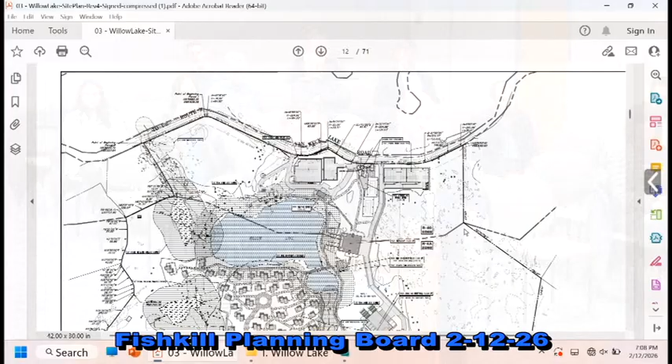Any further details you might want to give at this point? I know we'll have more discussions, but for the benefit of those at home who might not be familiar with it. Sure, I think from a high level, what we are proposing is a commercial recreation use, and what we hope to be a retreat.

Our use is very particular to enjoying the environment that Willow Lake is. There's going to be, I'm sure, a lot of discussion around what this site may produce. I just want to make one overarching comment, which is that the primary purpose of this retreat is to enjoy the nature and the beauty that it is set within.

We've taken special care and consideration to make sure noise levels and things like that are significantly considered for our own guests, which is obviously a major consideration for us, as they're only a couple hundred feet away, if not 50 feet away, from some of our main uses. We really put a lot of thought and care into how this is proposed and laid out, and we hope the public will see that we've considered all of the surrounding environment, and that it is our interest to make sure that is the case for them as well.

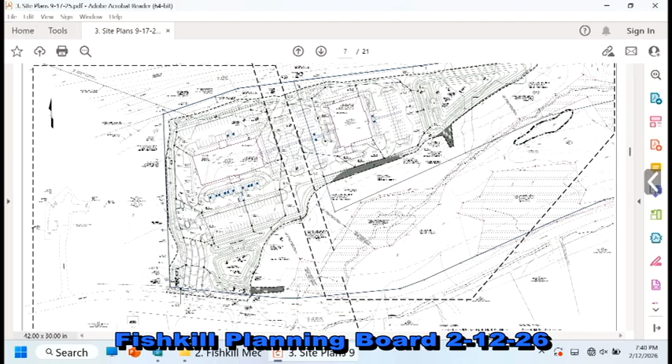To prevent further impact to the wetland areas, we have measures that will be implemented on site: control of dust during construction specifically, with dust control notes added to the erosion and sediment control plans approved by this board; implementation of erosion control measures during and post-construction, consistent with the SWPPP and erosion sediment control plan, monitored by our staff and the town engineer; and particular attention to avoiding any non-native or invasive species in the landscape plan, so we don't impact any wetland species.

The implementation of these design measures has been determined by the biologist to mitigate any potential for significant impacts on the nearby water resources. So, thank you.

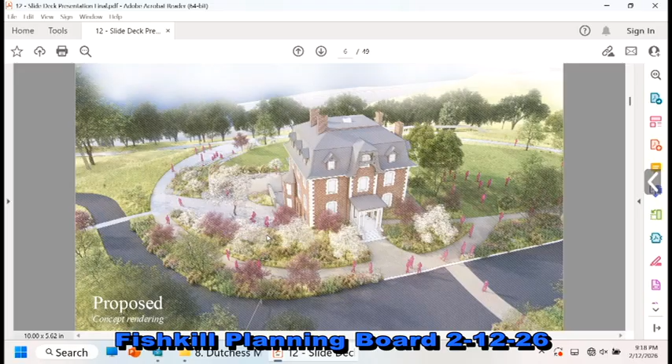Okay, so as we said, I'll go really quick. The proposal is to restore Dutchess Manor with historic restoration, removing the additions back to the original building, and then adding landscaping around the facility that would have public park space function, some classroom space, and public restrooms. We'll reconfigure the lot in the front.

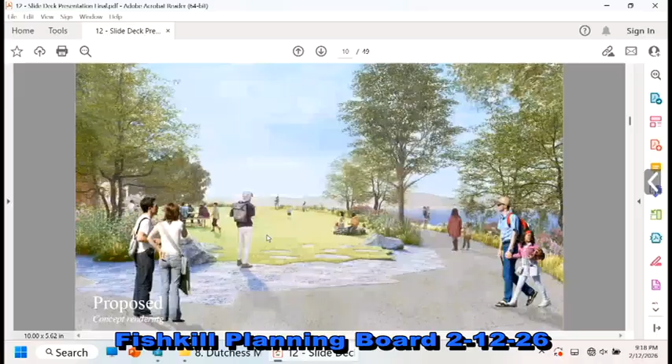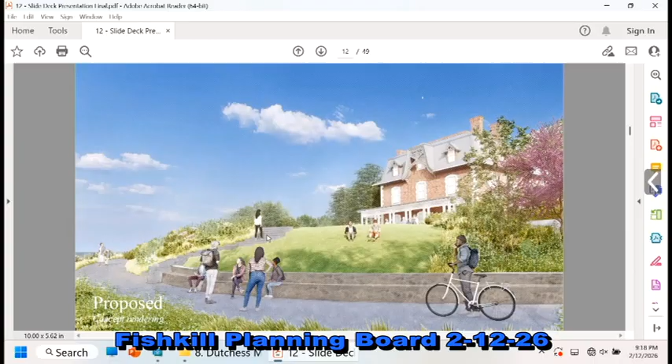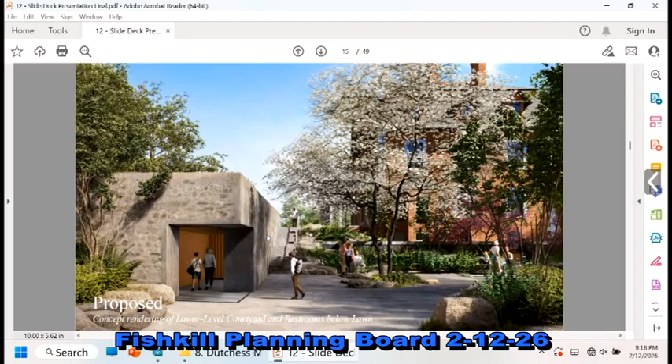This is the restored space behind once the building footprints are reduced. And this is behind the building, again, more space for just recreation. So before, after. This is on the side where the restrooms are, and a little garden space that could be used for a classroom or just a little gathering. So that's the development proposal.

This would be used as our staff office spaces. The first floor would be used as a visitor center, and then the parking and shuttle to bring people down to the trails at Breakneck.

The key themes we saw in the public hearing comments, by theme rather than comment by comment, are these five: parking and traffic, buffers and screening, trees, environmental performance characteristics, and some operational details. I'll quickly walk through those five topics. There's a combination here of information answering those comments, and also some changes and modifications we've made in response, and I'll try to call out which is which as we go.

So for parking and traffic, the key thought is that we're making the existing traffic and parking patterns safer and more organized than the existing condition overall through the corridor, because this is serving an overflow function with 9D, and managing the parking for regular use versus occasional overflow.

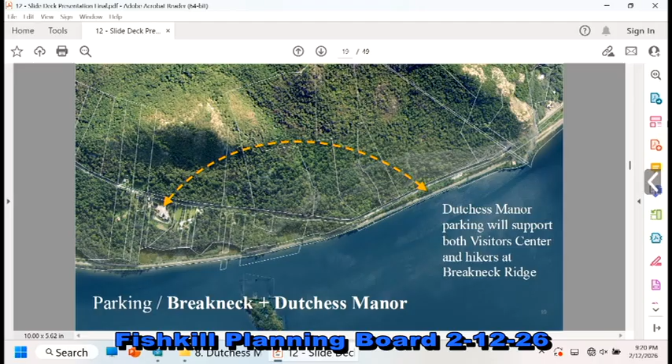This is the condition we've been working to solve down at Breakneck. We're cleaning that space up right now with the Breakneck connector, knowing there will be additional parking demand, looking to accommodate that up here, and then shuttling people down so they're safely off the road, not walking or parking in dangerous ways along the roadway as they have historically.

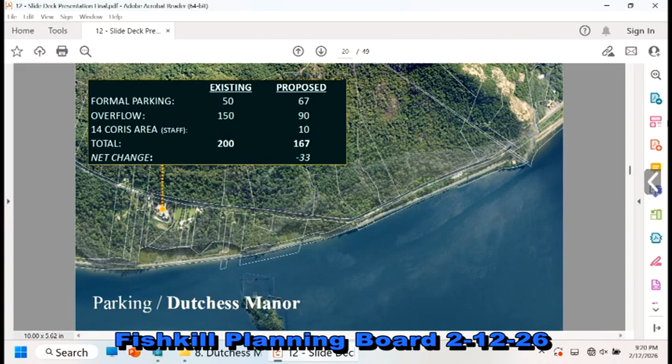The total parking relative to how it had been previously used is actually lower. We've gone down a little bit. The original proposal was for 181 spaces. We're now at 167. In the modifications, I'll show you where they came out of, but we've taken the total count of parking spaces down a little in this current submission.

The traffic study, there were a number of comments on it, but the study itself found no significant adverse impacts, and the review by Fishkill's consultants concurred with that conclusion.

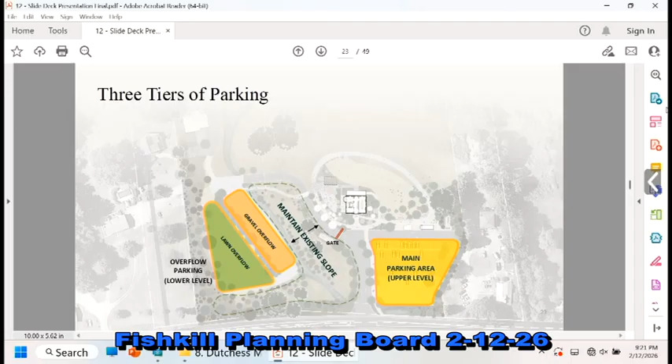This shows the planned parking locations in the site plan, both right in front of the building as it currently exists and off to the side. In the yellow area is the main parking supply, which is what's going to have daily use from staff and visitors. Because this is an outdoor recreation space, there's seasonality to the use, more peak weekend days. So year-round weekends and weekdays you'll see parking in the yellow. In the orange, it would really just be peak weekends. And in the green, the grass overflow lot, that's the last one we'd open up for use, so it would be the least frequently parked.

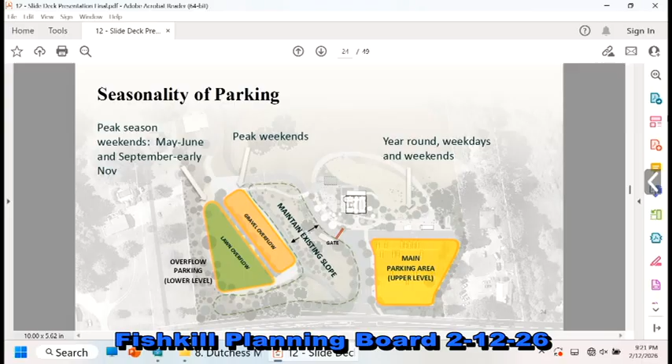The second theme was about buffers and screening, so there were calls to further expand the buffer to the south and retain more existing trees. We've done both of those things, and I'll show how that happens.

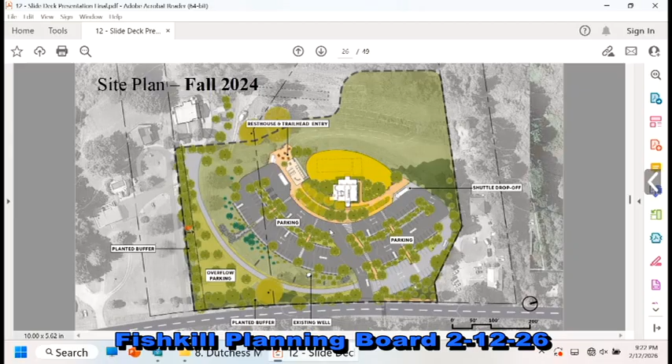We've done this over the course of the total development, but also in this last iteration. The original site plan had this configuration for the parking, shown in dark gray, all paved parking. Closer in this area, all of this would have been a regraded hillside with parking there. We've pulled that up and away from neighbors to the south and put it in the existing lot location for the regular everyday parking.

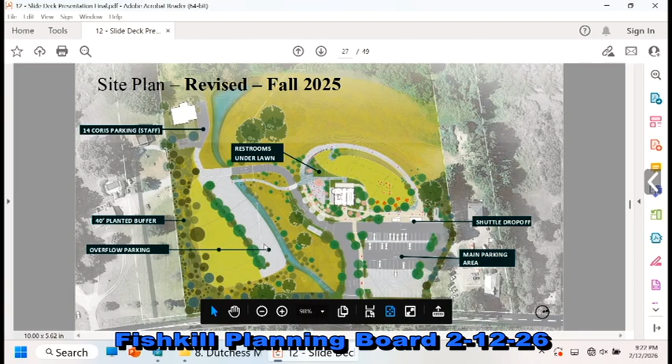This is seasonal parking, really used in peak seasons of May, June, and then the fall foliage peak. These are some of the explorations as we tucked that space in.

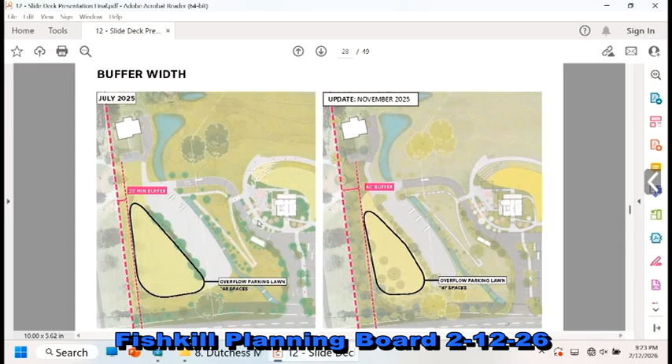After that move, we've continued to condense that footprint. You see in July the footprint, followed by the November footprint, which was much thinner and added more buffer space—we went from a 20-foot buffer to a 40-foot buffer. Now we've further expanded that buffer on the western side towards the river, closer to the homes there—it's a 45-foot buffer, widening as it approaches 9D, which is more of the view shed for adjacent neighbors, to an 82-foot buffer. To do that we had to reduce parking, so about 17 spots came out of that location, and we took one more spot out of the gravel area in order to save a tree.

On trees: in the revised plan we were asked to keep more of the existing trees so there's more day-one presence in the plantings instead of newly planted trees. We are planting between 300 and 350 new trees, which will support biodiversity. We've selected a plant palette that matches the oak-tulip forest of the park preserve across the street, trying to pull that down off the mountain.

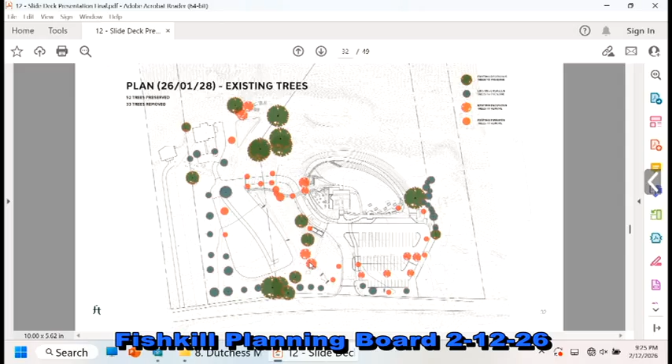Because we're planting lots of trees, these are new trees coming in that are over 4 inches of caliper or higher, so we aren't putting in all just little tree sticklets. There are going to be some substantial trees placed into this planting strategy, and at the end of the day, this will be the tree plan, looking at about 400 trees on site.

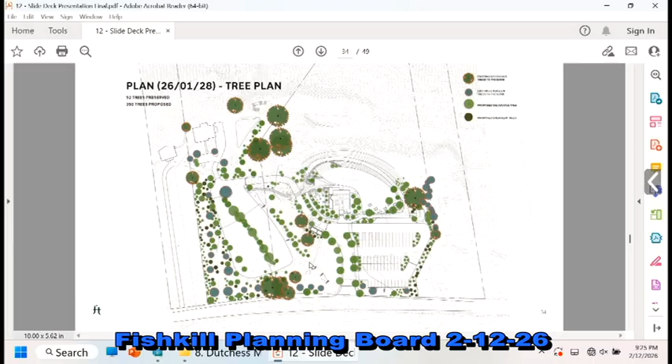Closer to the house, it's using this forest edge, so you have some flowering trees like red buds and dogwoods, and in the more expanded area of the site, we're pulling in that oak tulip forest, which is what's at the park preserve. So all native plants, and those will have different functions—some have berries and are good for pollinators or birds, and that's the mix we're pulling in.

Third theme is environmental performance. We'll note that we are reducing the impervious surface from the existing condition with the proposed development and making a number of moves to improve the habitat and ecosystem health.

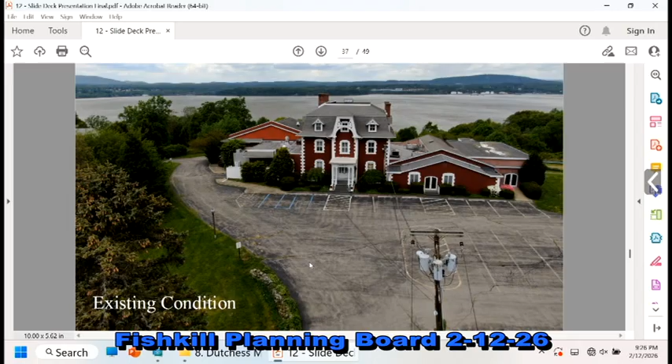This is the existing condition, and obviously the building components that we are taking down are all impervious surface, so when you remove those, you gain a lot of space to work with. This shows the statistics: in the total new site plan, it's 0.14 acres less impervious surface than the existing condition.

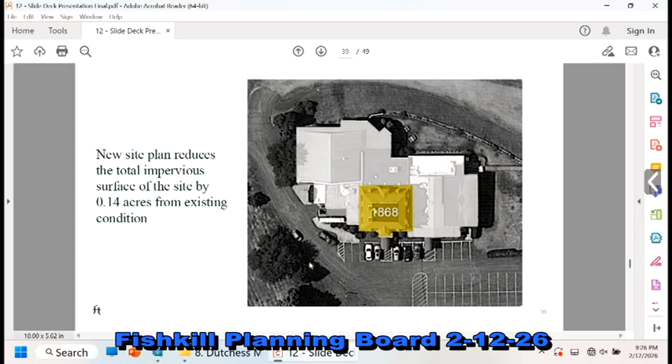And then what are we putting in? Right now it's just a standard lawn, grass lawn with some ornamental species. We'll be planting in the bioswale, which is the drainage area that goes along the side and down to the back of the property, with plants that can get wet and dry and handle that condition well, like Joe Pye weed. And behind the building, the restoration meadow that we've talked a lot about has a mix of native meadow.

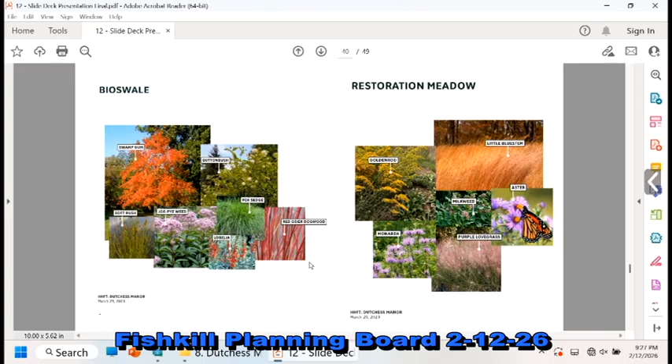This is a rendering that shows how that might be in the future. And a note—this is the space, there was a memo in your packet speaking to the ways we're using targeted herbicide treatments of invasive species as we prep this space, which is currently overrun with invasives, for a restoration planting of a wildflower meadow.

So you have hopefully enough detail about what's being used, and I'll just augment that we are also using other means—it's not to say that's the only thing we're doing to combat invasives. There's been targeted mowing, we use mechanical means wherever we can, or in the future, once the Japanese knotweed is brought under control enough, you could place black plastic on that, and that can get it the rest of the way.

This is based on best practices and the species that are present, and there are different levels of what you need to do in order to combat them. Once they're under control, which takes maybe 2 years, then you have the planting—those native plants should be able to win that battle, and you can cease treatment. It's really about getting them under control enough that a restoration planting can be successful.

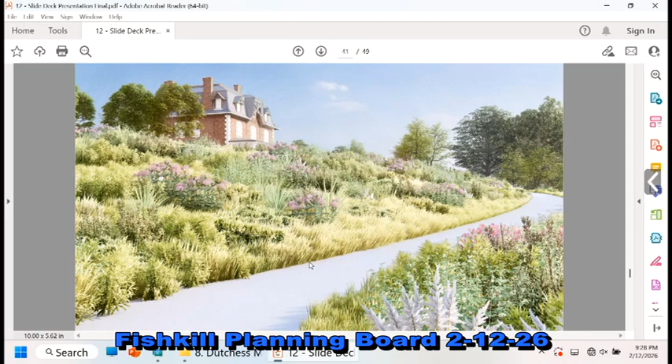Theme 5 is the operational details. So hours of operation was raised, lighting and security, shuttle frequency. Hours of operation are dawn to dusk.

We have a lighting plan that's in the submission. That's been through the analysis of foot-candles, and it meets all of the regs of the town—so this is complying, the lighting plan complies with your rules.

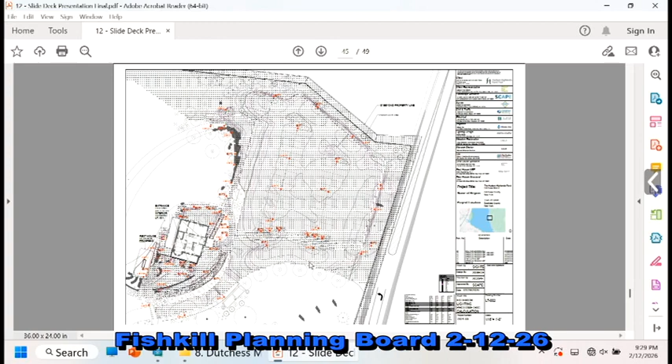And then we have some signage. There's some curiosity about what signs we're using—this is part of the palette that we have. This is the gateway sign on the roadway. There'll be smaller directional signs as you drive into the driveway that tell you, like, the shuttle goes this way, and where you can park. There would be a gate here to stop people from driving down unless we opened it on a peak day, and directional signage that'll take you to the bathroom. So there's a whole suite, and hopefully that's enough detail, though we're happy to provide more in the site plan process.

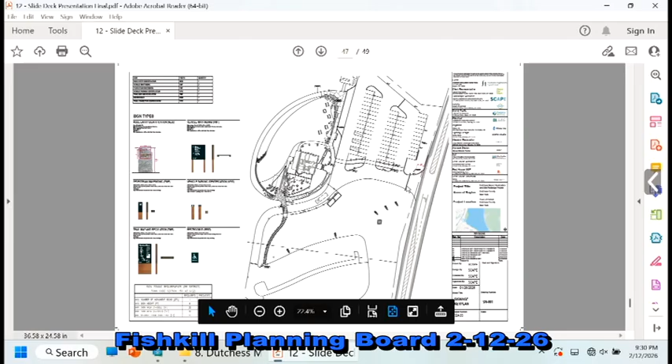And then about the parking and shuttle system, it's drive-in. There's these little pay kiosks, so you can do that with your license plate, and somebody can come around and scan and see if you paid.

This also has a mobile app feature, so if you're at Breakneck and you can't find parking, you can look at the app and it'll say spaces available still at Dutchess Manor, and you can come up and know predictably that you can park there. And as you're driving, you predictably know there's no spaces at Breakneck, so you don't have to go sharking around in there.

So again, we're trying to clean up that driving behavior. And then the shuttle vehicles, this smaller Sprinter van style shuttle, would just zip between, in the near term, right as we're opening, serving between Dutchess Manor and Breakneck. So if the lot's full, you go park at Dutchess and you can hop on the shuttle and go down.

Round trip is about 5 to 7 minutes, so it's really a quick lead time, so no one should worry about waiting. What are you going to do during peak times? That is peak times. I think we have plans for 2 shuttles, so one could be going, and they can be going back and forth.

And that was that. Those were the 5 themes.

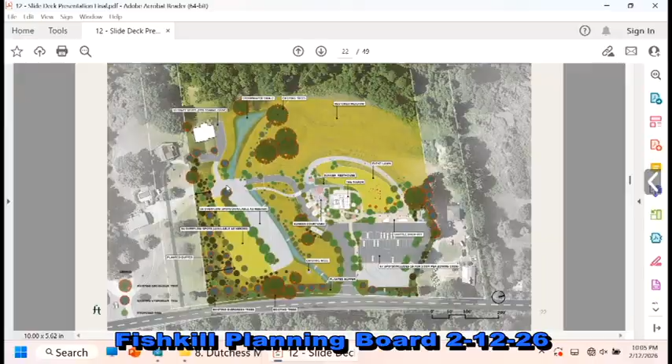So there's just one driveway into the site? In the future, yes, just one driveway into the site, because they're getting rid of the other road. So will you have a code to get by that gate? Or a little swipe card, yeah.

Okay, can I have a few... speak that into the microphone, Fred. Don't do it, Fred.

So I know we spent a lot of time on the parking—other comments from board members?

I did have a question about the inside of the building, how you're going to set that up for the public. So the big room to the right—when you walk into the manor, to the left would be a room that's currently like a coat closet or storage, which would be used as a reception area. Somebody would be there to greet you as you walk in, answer questions, provide maps and information, sell a bottle of water if you forgot one, and then you could go back out. The hallway in front of you has a room to the right that goes from the front of the building to the back. Are there going to still be windows in the back? No, that ballroom building's gone, but there would be new windows in the back that take you out to a restored porch, because that's the view.

And then the room to the right would be a flexible space. We show it with a boardroom in some of the architectural drawings, but the idea is it's a very flexible table that can be broken up, moved, folded up and put aside. It would only need to be set up for meetings if one was happening; otherwise you could have a 3D map of the trail and other interpretive materials around the room. So most of the time it's an interpretation room, but it could be set up for a meeting if a group wanted to use it.